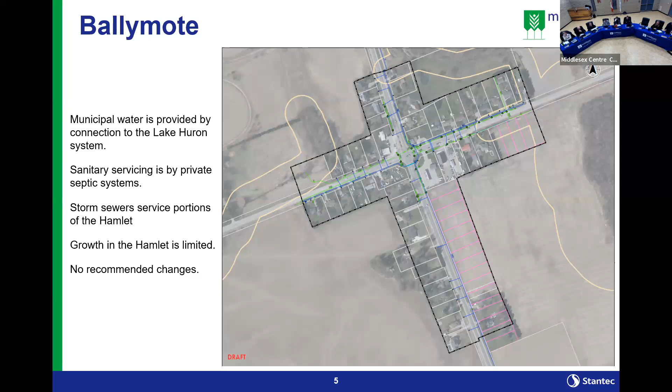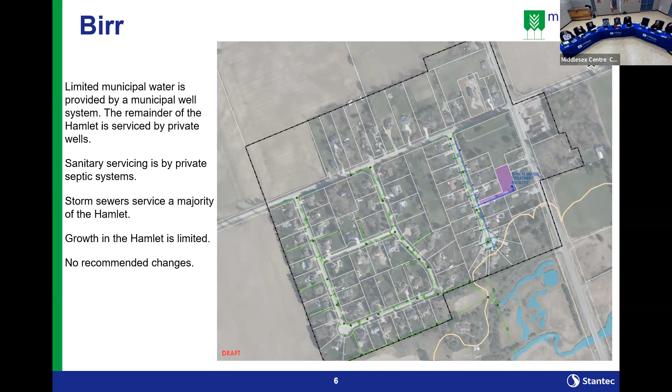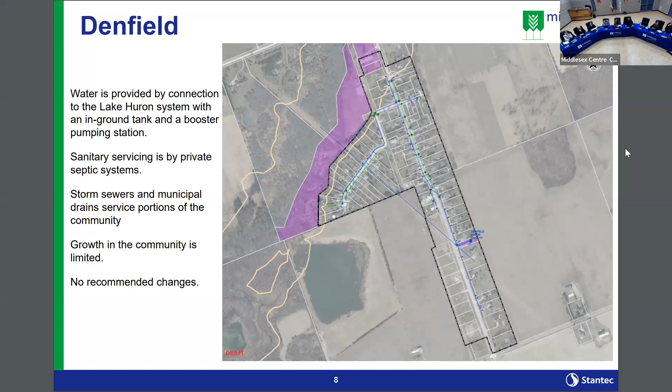Moving on to Denfield, we also have a connection to the Lake Huron water supply system, with some infrastructure in terms of water treatment and distribution, an in-ground tank and a booster pumping station. Again, we have private septic systems, similar to most of your hamlets, and a limited storm sewer system. There's limited growth in this community, and we're not recommending any changes to the servicing for Denfield.

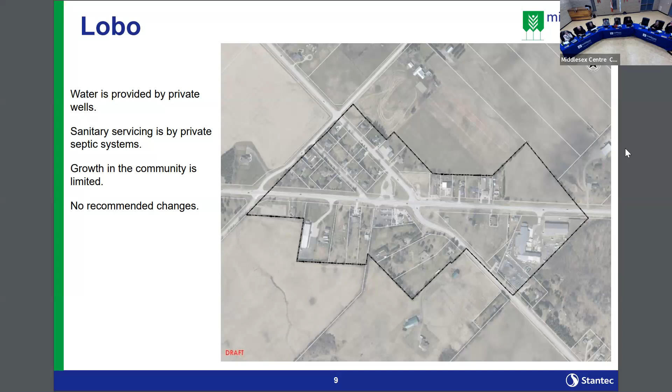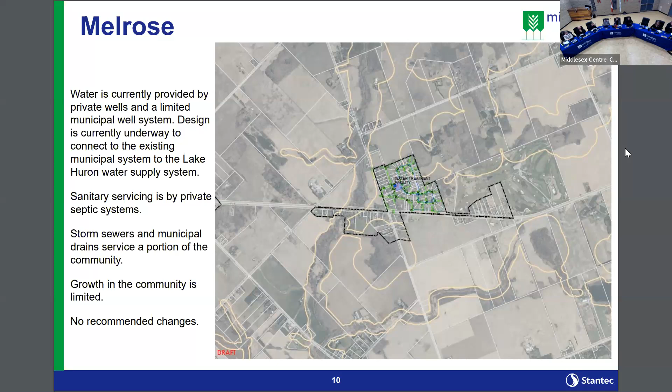Melrose has a little bit of activity. It's currently serviced by private wells and a limited municipal distribution system. There is a project ongoing right now - Stantec is working for the municipality connecting that system to the Lake Huron water supply system, which would bring Lake Huron water to the existing distribution system. There's some provision for expansion, so that could service the rest of Melrose. That project is underway. We do have sanitary servicing by private septic systems and some storm sewers, again with very limited growth. With the change of the water system, there are no further recommended changes to Melrose.

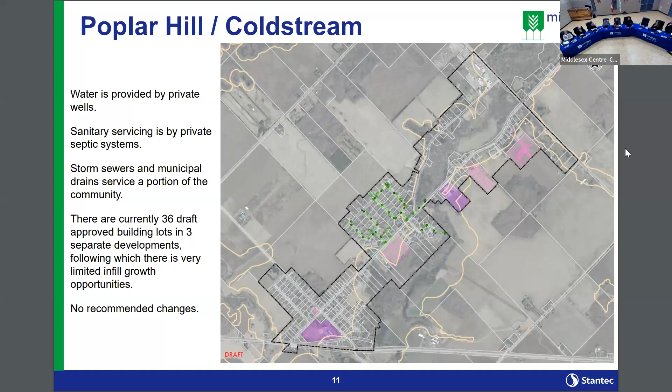For Poplar Hill Coldstream, we have a little bit of growth happening. Again, we have private wells and private septic systems. Notwithstanding the fact that there is some growth, there's really no good opportunity to provide municipal services to Poplar Hill, nor would it be cost effective. So similar to the previous hamlets, no recommended changes.

Okay, now we'll get into something a little bit more meaty. I wanted to go through some of those other hamlets just to give you a lay of the land and to recognize that they were all looked at and considered.

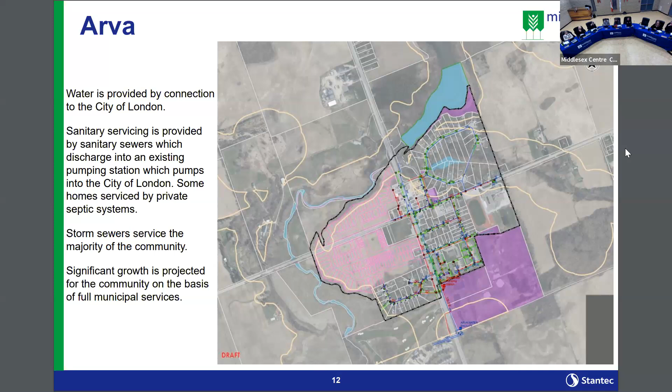Your current system comes to the sanitary pumping station, which pumps into the City of London system. You have two parameters in your agreement with the City of London: one is a maximum cap of flow you can send into their system, and the second was an annual cap as well.

The municipality was successful in negotiating away that annual cap. So the only limitation you really have now is the maximum flow you can send into the City of London system. That maximum isn't enough for all the growth in Arva, but it will allow some growth to occur. Our recommendation is to continue sending flows to the City of London.

That will last you for some growth in Arva, and over time you'll renegotiate that agreement with the City of London. That agreement may come with some costs, and it was outside of our scope to look at what impacts that would have on the City of London system.

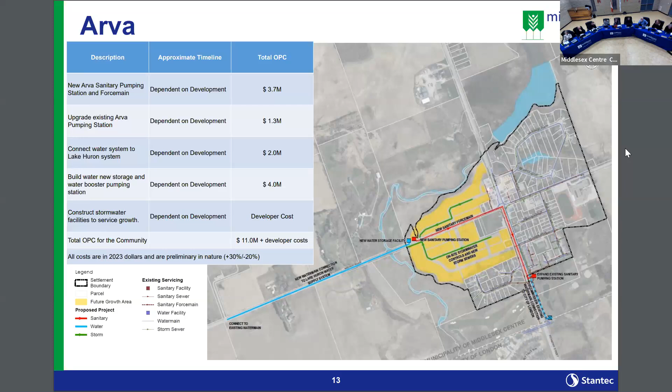Okay, I'm going to move on to Delaware. We currently have water supplied by the Lake Huron water supply system, but it runs through Komoka. So Lake Huron comes to Komoka, and Komoka then passes that water on to Delaware and to Kilworth. We also have a water storage facility on Longwoods Road as well as a booster station. We do not have any sanitary servicing—everybody knows that one, it's all private septic systems—and we have some storm sewers in place for the community.

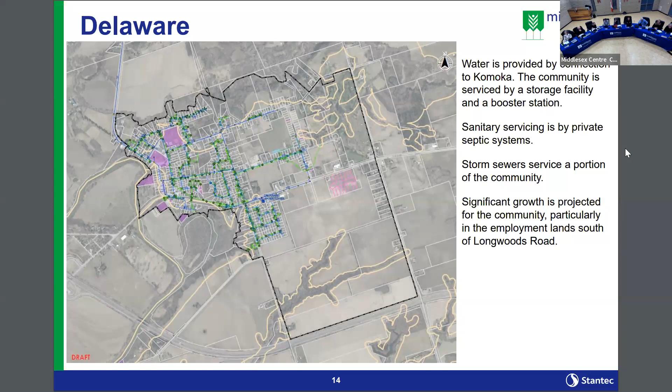We do have a significant amount of growth planned from Delaware, particularly in the employment lands, which I know was identified as something important to the municipality. So with that in mind, how are we going to service all of this?

The first thing we're looking at is how do we service it in terms of wastewater treatment. As I mentioned in my example at the start, looking at various alternatives, our recommended alternative is to send flows to the Komoka wastewater treatment plant. That does trigger upgrades to the Komoka plant, as you'll see on future slides, but it's still your best option in terms of how to treat flows coming from Delaware.

How do we get flows there? Well, we've recommended a couple of pumping stations. You'll see a red dot here—this is pumping station number 1. We've located this basically in the middle of your employment lands, and I worked both in terms of priorities and phasing and topography to locate it there.

Then you'd have a network of sanitary sewers emanating out from that pumping station. The flows would be collected there and sent by force main, pumped up to Longwoods Road, across Longwoods, up Carriage and Gideon, and up to the Komoka plant. That's how the flows would get there.

This pumping station would generally service most of the growth area for Delaware, or looking at it another way, it would service generally the table lands in Delaware.

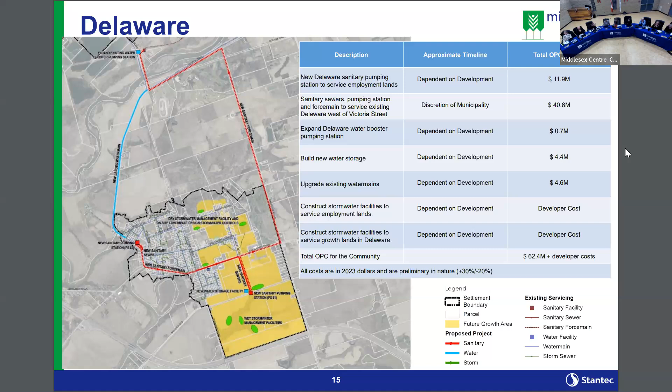Oh, and sorry, I missed this one. We also have an upgrade to an existing water main—this is your connection to Komoka. Under existing conditions, you're well serviced by this water main, but as the community grows, the water main is too small in diameter to service your growth. So you are going to have to upsize this water main essentially from the intersection of Gideon and Komoka Road through to the edge of the community. That will be a project that, as growth is occurring—so we say dependent on development—as you see growth occurring, you're going to have to trigger that project.

Okay, moving on to Ilderton. Again, existing conditions here: we have water supply by the Lake Huron water supply system. We do have sanitary servicing pretty much throughout the settlement area of Ilderton. We have 4 pumping stations in Ilderton, which is certainly a lot for a small community like this, and of course a wastewater treatment plant which services the community, and we have some storm sewers. We do have some growth here, both occurring and ongoing, as well as growth in the south end of Ilderton.

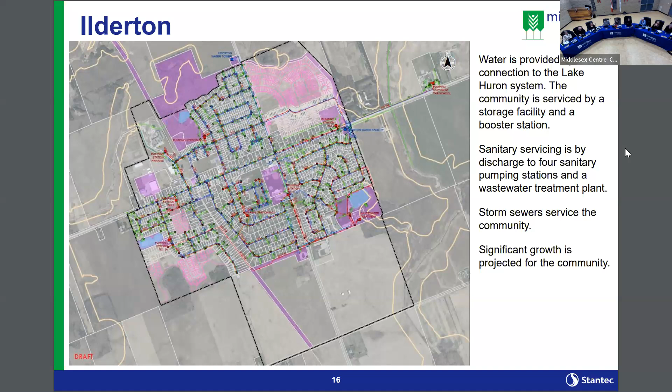So, projects for Ilderton: the one thing you're going to come up against in the not-too-distant future is the need to upgrade the Ilderton wastewater treatment plant. Based on those linear growth projections I talked about earlier, we're saying you're going to essentially hit the trigger in about 2028. That's essentially when you're going to want that project implemented. Obviously you'll want to plan for that project earlier than 2028, but that's essentially when it becomes necessary based on the growth forecast in Ilderton, and you're looking at approximately $9 million for that project.

One of the things we looked at here is because you have so many pumping stations in Ilderton, we looked at opportunities to consolidate pumping stations and take some of them offline. They are a burden to the municipality in terms of operation and maintenance costs, and there's obviously a risk factor associated with any pumping station.

There was limited ability to do that, but we have recommended that pumping station number 3, located on High Park Road in the middle of the community, be taken offline. This would involve extension of sewers downstream, an easement required through some private properties, and upgrades of some sewers in the existing subdivision. You can see from these red lines there's a fair bit of work to upgrade those sewers to receive the flows from pumping station number 3.

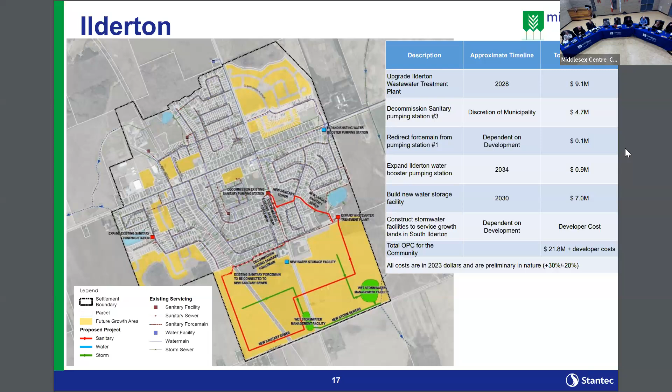We did show a couple of projects here in terms of servicing what we refer to as Old Kilworth. This is very similar to what I said about Delaware and servicing existing Delaware. We gave you a plan for how you could service the Old Kilworth area—those areas that are on septic and wells, and how this could be serviced. Essentially it would come to the existing Blackwind pumping station. This station would have to be upgraded and then flow sent by forcemain into your gravity sewer system.

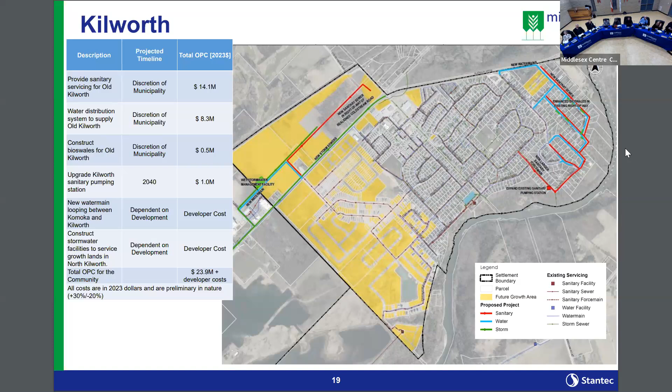What we're recommending here is a second water main. We're recommending you look for opportunities to do that through new development on the north side of Glendon Drive. We're aware the municipality had planned to twin the main on Glendon, which is also a valid option. So the plan here would be to create a second feed into Kilworth to establish that redundancy.

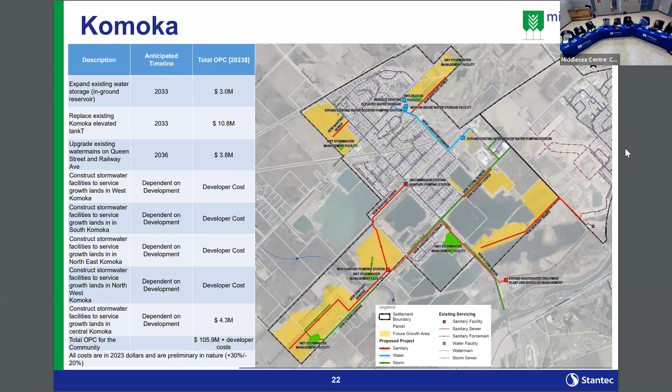Just mindful of my time here. Solid waste—not a lot to speak to, but obviously we did look at your existing solid waste system. One of the big changes that you have coming is what they refer to as extended producer responsibility system. Essentially, the regulations are causing those producers of packaging and waste to have to manage the costs of that. So that's a change that you're going to see in the system, and I know you're very well aware of.

Obviously, there's some opportunities to divert more waste, both in terms of organic collection as well as recycling. In terms of recommendations, you're well served by BRA—there's no recommendations to change that, it's still the best course of action. But there will be opportunities upcoming. We expect for organic matter collection and a little bit more diversion to composting and anaerobic digestion.

Okay, so that was a lot to digest. I just wanted to summarize a couple of things here—some of the things that we found through the course of the master plan. One of the things I want to be clear about is that your existing system is in really good shape in terms of its existing needs. So a lot of what you're seeing me talk about here tonight is growth pressures, and you have a significant amount of growth causing pressures in terms of upgrades, but your existing system is in very good shape in terms of its capacity.

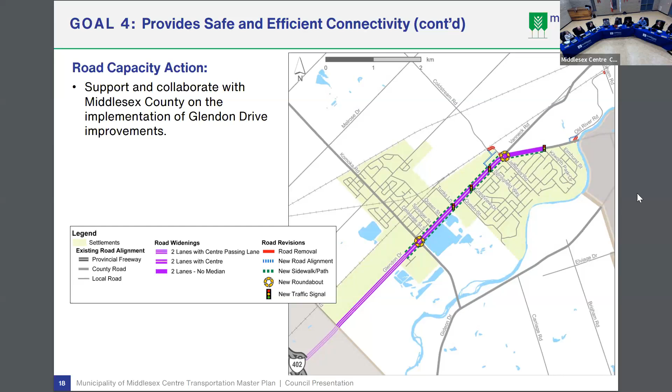As far as road classification, currently the official plan classifies local municipal roads as local roads. Adopting a road classification framework that recognizes that local roads really vary in how they're used - some carry more traffic and would prioritize traffic movement a bit more, as opposed to other local municipal roads which have lower traffic volumes and focus more on local land access.

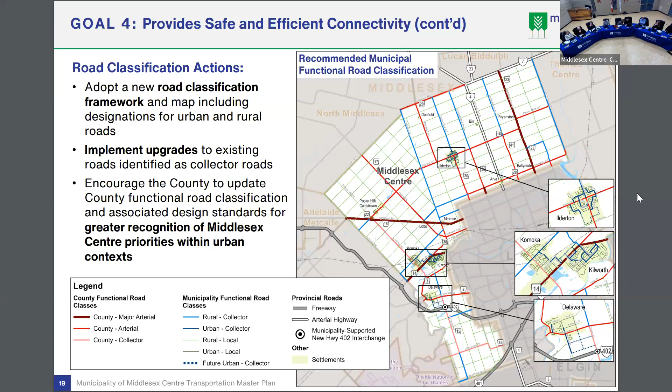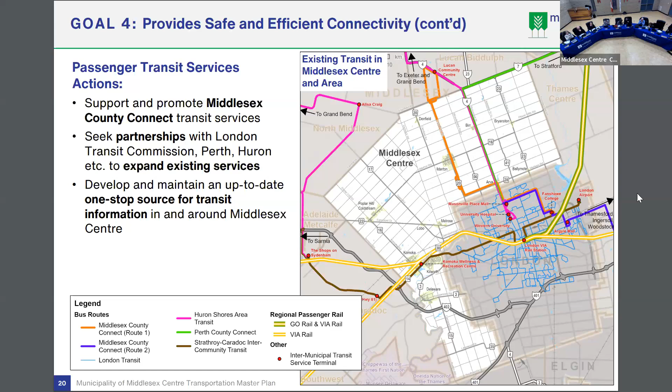We'd also recommend seeking partnerships with London Transit Commission to extend service into Middlesex Centre, as well as with Perth and Huron counties. They do have services going through Middlesex Center, but they don't stop in the municipality. Also, to develop and maintain an up-to-date one-stop source for transit information in and around Middlesex Center, so residents could just go to the Middlesex Center website and see what services are available nearby, maintaining that over time given the range of service providers.

As far as road safety actions, the municipality has a Vision Zero campaign, and that should be continued to increase safety in the municipality. Also to continue to collaborate on county road safety improvements. We've heard concerns about speeding on county roads and settlement areas, and the municipality is working with the county to try to control those speeds.

We did an analysis of collisions, 5-year collision data in the municipality. We identified the top 10 collision locations and put forward some mitigating measures to consider as appropriate at those locations. In doing that analysis, we found that a significant proportion, about 40%, of collisions in the municipality involve wildlife. So it'd be good to understand that more and apply some wildlife collision mitigations on selected corridors as appropriate. Now, another aspect of safety is at the at-grade crossings in the Komoka-Kilworth area.

We know that when Oxbow Drive improvements related to cycling, which we'll talk about soon, are in place, there will need to be a review of the rail signal warrants, because the gates are currently quite close to the road, and widening will need moving them, and to continue to review at-grade rail signals over time as conditions change, as traffic increases, and so forth.

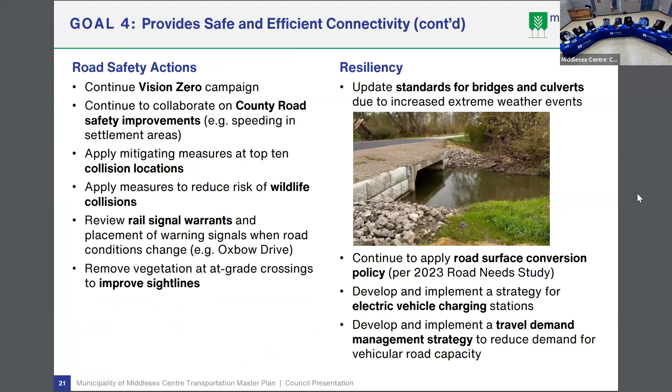And in looking at the county cycling network through those guidelines, we noted that a few updates to the strategy, to the county cycling network, as it relates to the portions that would be on municipal roads, would be warranted.

So that's a really key connection there for the municipality. Other municipal connections identified in the county network are the north-south connections on Wonderland and Adelaide. Given the high volumes on those roads, buffered paved shoulders would be most appropriate for those. Part of the cycling strategy would be to continue to support the county as they implement their network, which mostly is taking the form of paved shoulders.

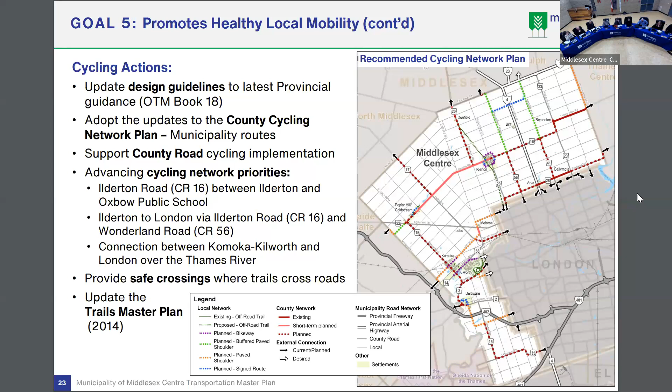As far as encouraging pedestrian activity, we recommend continuing to follow the province's guidance for implementing pedestrian crossings. The province lays out what circumstances warrant a school crossing, a pedestrian crossover of different types, or traffic signals and so forth. In collaboration with the county, we would like to see some current school crossings upgraded to pedestrian crossovers.

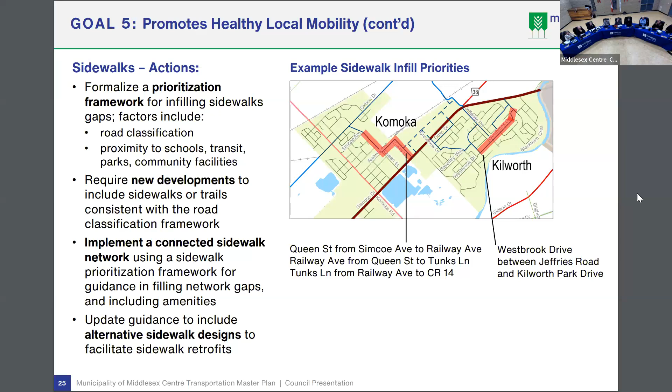Finally, it would be good to have some guidance to include alternative sidewalk designs to facilitate sidewalk retrofits. The current design is to have sidewalks 2 meters away from the road, which is a harder sell in established neighborhoods. A design that brings the sidewalk close to the road or at the road would be appropriate to help with infilling in some cases.

And the sixth goal: supporting local industries. These actions fall into the categories of supporting goods movement and also ensuring parking supply.

The most significant and intensive action is to collaborate with the county and the province toward a new Highway 402 interchange. Carriage Road seems to be the most appropriate location for that interchange, and this would involve collaboration with the county and the province.

We did some high-level assessment through our strategic framework to show support for this interchange at this location, although an environmental study that looks into alternatives in more detail and looks more closely at the environmental impacts of the interchange would be required.

As I mentioned, City of London staff at our stakeholder meeting thought it would be a great idea, because it would reduce the cut-through traffic through the Lambeth neighborhood in London.

That should be built. The other actions to support this movement include working with partners, CN and CPKC Railways, to explore the feasibility of a road-rail transfer station. That's been talked about for some time — it would be great to just move that forward to a business case and explore it further.

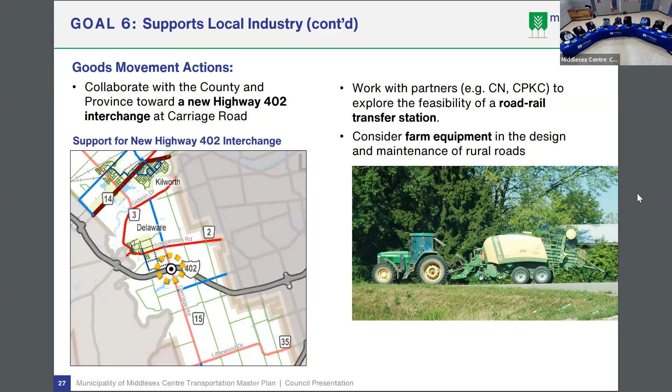Also, to consider farm equipment in the design and maintenance of rural roads. Our phase 2 report lays out some of the challenges that farm equipment faces when moving on the road, some of the regulations, and some potential actions to better incorporate or reflect farm equipment needs in road design and maintenance. The final action relates to parking supply.

Parking supply in Middlesex Centre is currently not a concern. There is an official plan policy that speaks to ensuring parking supply to support local businesses and village centers as growth occurs.

This recommendation also seeks to look at parking supply not just for the sake of parking, but also looking to where this can dovetail with other objectives, such as electric vehicle charging, supporting carpooling, and transit services. It may be appropriate to put a transit stop at these parking sites, for example. We've identified one potential location to look at as part of the strategy to ensure parking supply in Delaware.

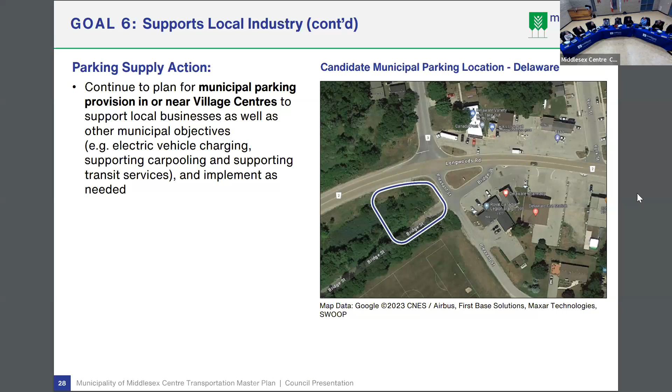That touches on all 37 of our recommended actions. Now to talk about some implementation considerations. Our phase 3 draft report, our TMP summary report, lays out an implementation plan for each of the actions in terms of short-term targets over the next 3 years, and medium-term targets looking out 5 more years to 2031, and finally long-term targets through another 15 years to 2046.

In this action plan, we've also laid out broadly what the cost would be for some of the higher cost items. We also looked at the cost for some of the higher cost items only. A number of the actions could be implemented within the municipalities' operating and capital budgets, or at a low incremental cost to those.

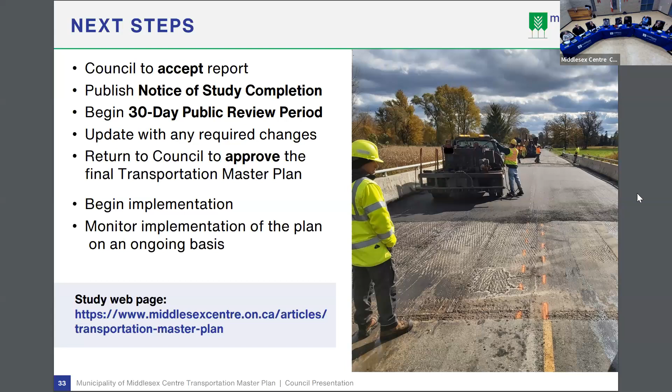There would be a 30-day public review period of the documents. We would update the documents with any required changes, and then we would return to council to approve the master plan after those updates. Then implementation begins, and we have a few notes on monitoring the implementation as well. These documents are on the study webpage, which is listed there. That concludes the presentation.